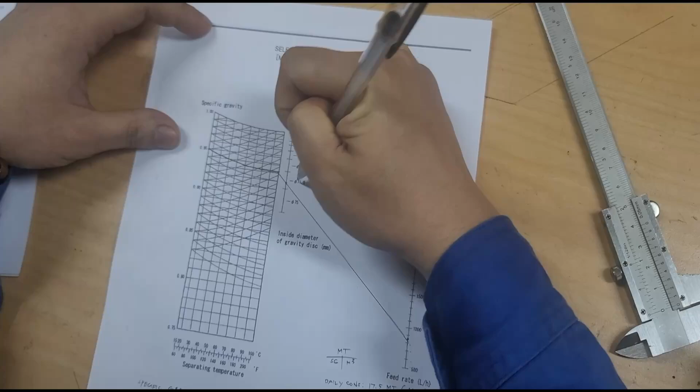71.5. That is our inner diameter.

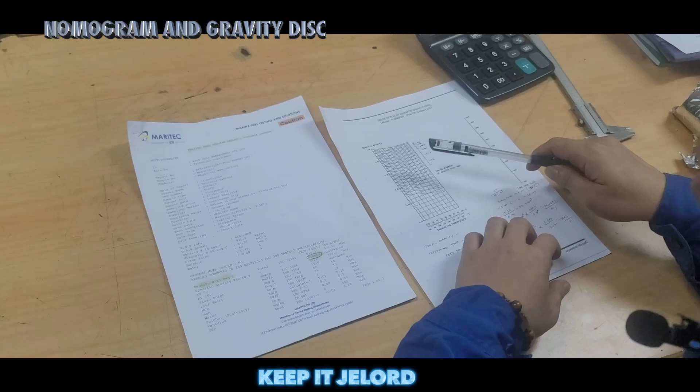Hello everyone. Today I will show you how to select a gravity disc using our nomogram. First, we must have the lab test result and also the nomogram. As you can see in our nomogram, you can see the specific gravity, the separating temperature, and the feed rate.

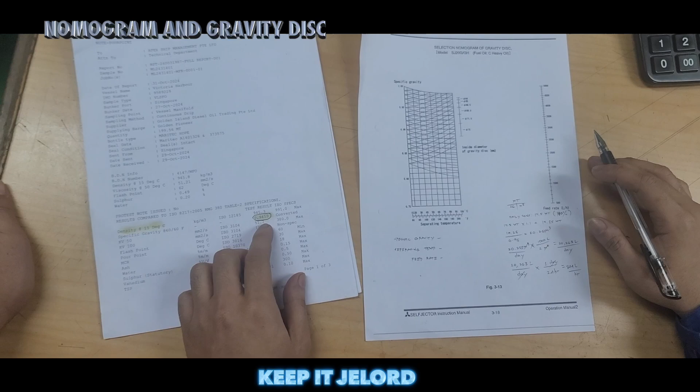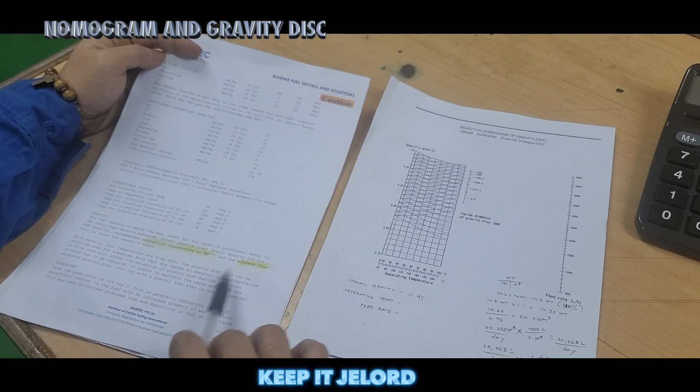So let's start. Specific gravity. Based on our lab test report, our specific gravity is 0.9459. So let's write it down. Just convert to 0.95. Then our separating temperature, go to the next page. According to our lab test report, our separating temperature is 80 degrees Celsius. So write it down. And then last, our feed rate.

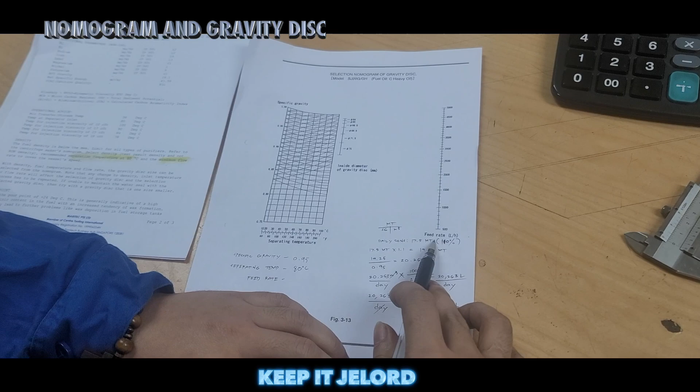So when we talk about feed rate, it is 110% of our daily consumption. Here I already showed the solution. So our daily consumption is 17.5 metric tons. So the 110% of our daily consumption, which is 17.5, is

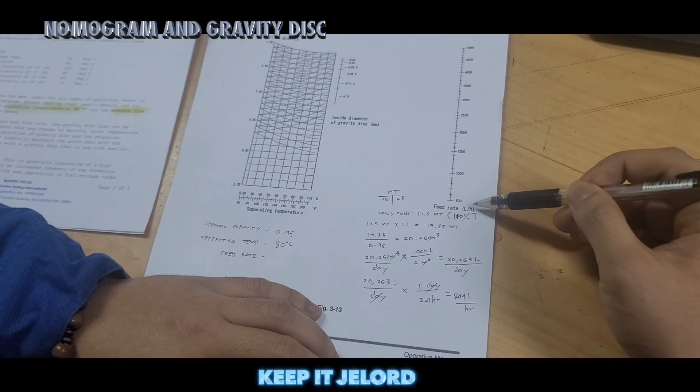So in our feed rate, we have a unit of liters per hour. So this 19.25 metric tons, we need to convert it to liters per hour. How?

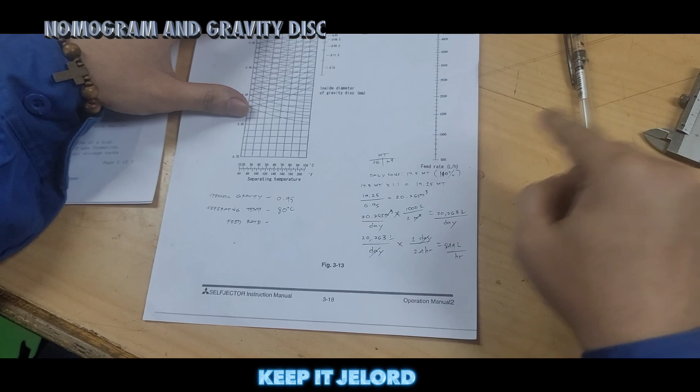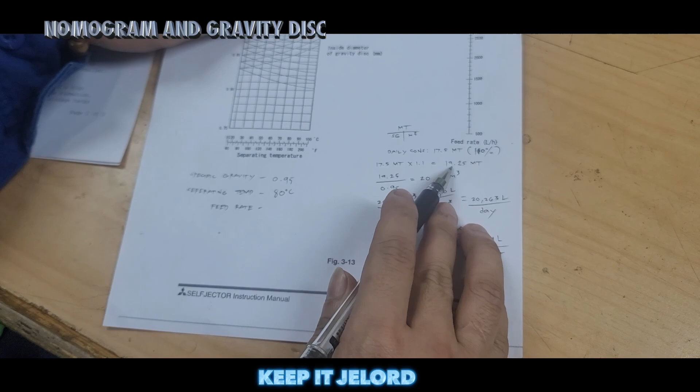So we will use the triangle method. As you can see, this is metric tons. We need to convert it to cubic meter. So the formula is metric tons divided by SG. Now we already have given the metric tons and SG. So our metric tons is 19.25 metric tons and our SG is 0.95. 19.25 divided by 0.95 equals 20.263 cubic meter.

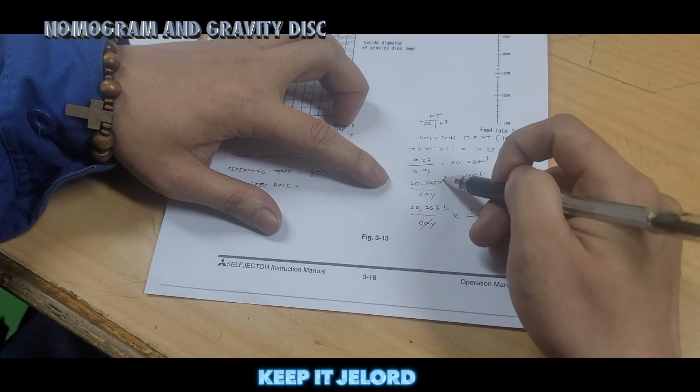So still cannot. We need to convert it to liters per hour. So write it down, 20.263 cubic meter. 1 cubic meter equals 1,000 liters. So cancel. 20.263 times 1,000 liters is equal to 20,263 liters. That is per day.

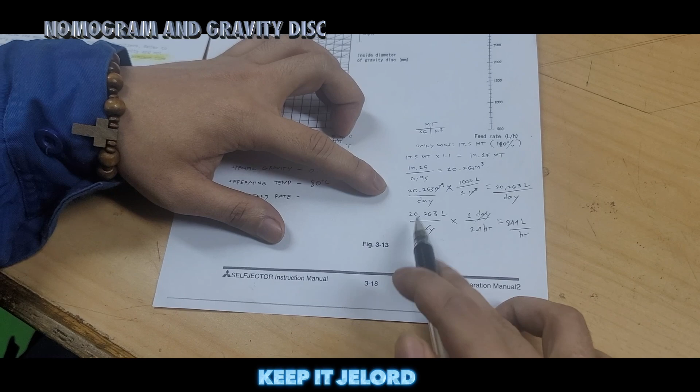So we'll convert it to per hour. 20,263 liters. So in one day we have 24 hours. So cancel. 20,263 liters divided by 24 hours is equal to 844 liters per hour. So now we already have feed rate. So we will write it down, 844 liters per hour. Now our given is already complete.

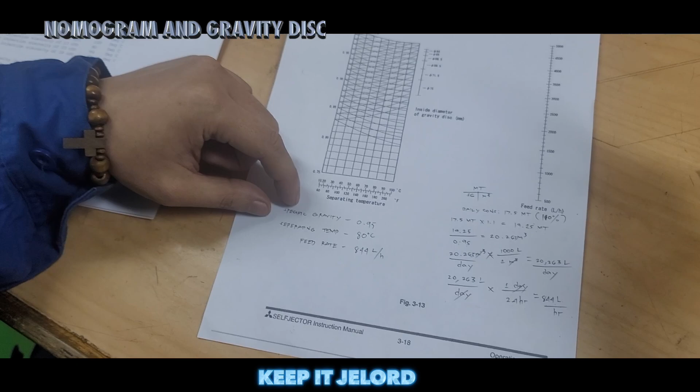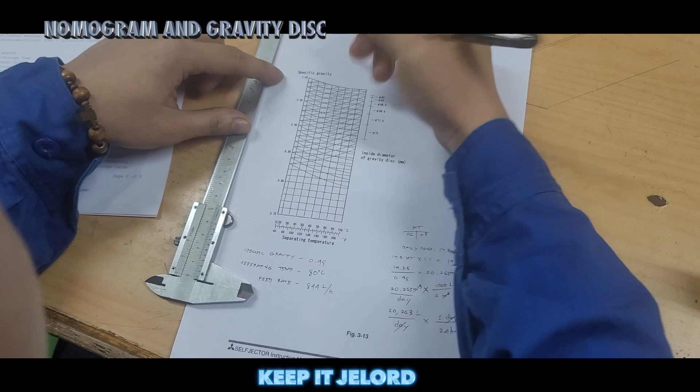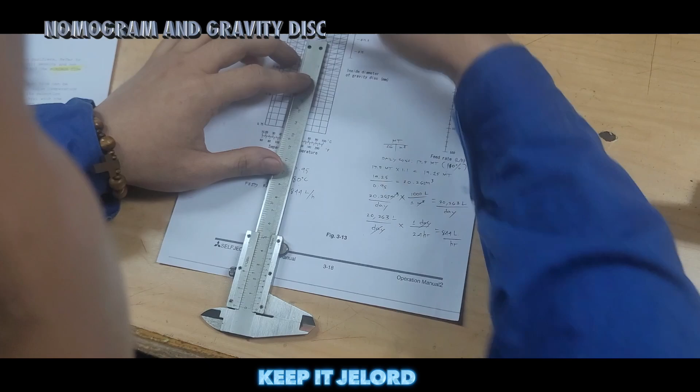We have specific gravity, separating temperature, and also feed rate. Now we will start plotting. So our SG is 0.95. So we will plot this one here, 0.95. And our separating temperature is 80 degrees Celsius. So separating temperature 80 degrees Celsius here. Then connect it to 0.95 here. Then draw a horizontal line towards 100.

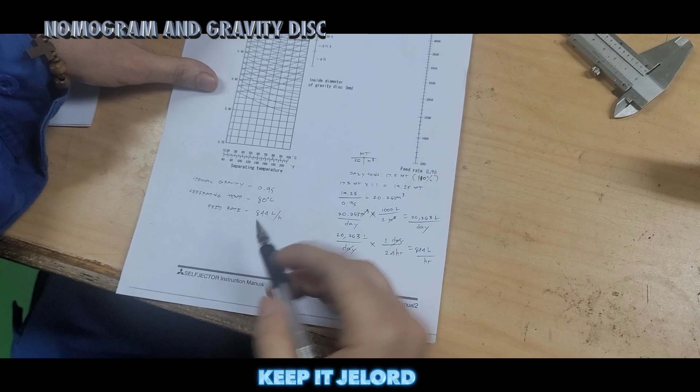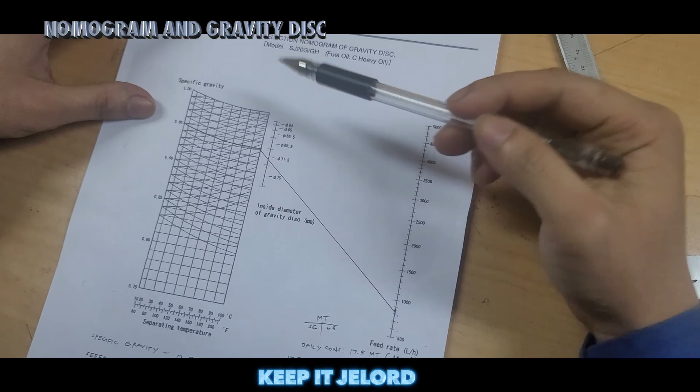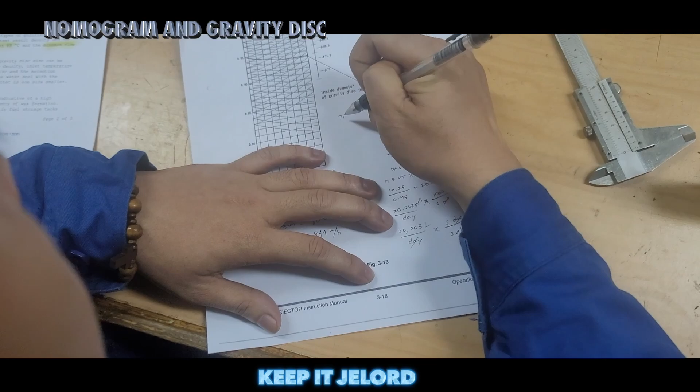Then last is our feed rate. So our feed rate is 844 liters per hour. So this is 500, 600, 700, 800. So 844, let's say here. Then last, we will connect it. Just draw a straight line. Now, as you can see, it intersects here at 71.5. That is our inner diameter. So our answer for this given is 71.5 inside diameter. So that's it guys on how to get the correct size of our gravity disc using a nomogram.